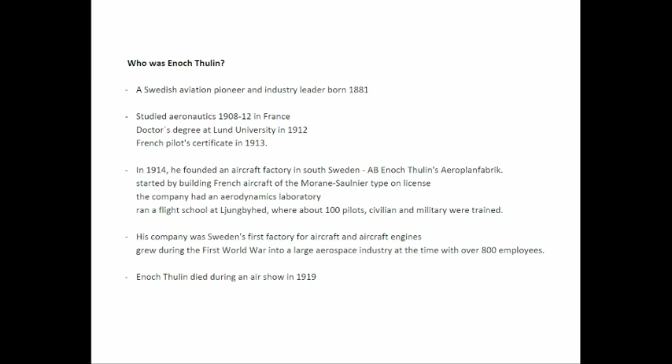But then he died during an air show in 1919, and the war was over, and there was no demand for his aircraft, so his company went bankrupt very soon.

But to his memory, we have the Thulin Medal by the Swedish Society of Aeronautics and Astronautics, and this memorial medal was instituted in 1944, and it's the most prestigious award for aviation and space in Sweden. It's available in 3 denominations: gold, silver, and bronze. So then you have the background about Enoch Thulin and why this lecture was named after him.

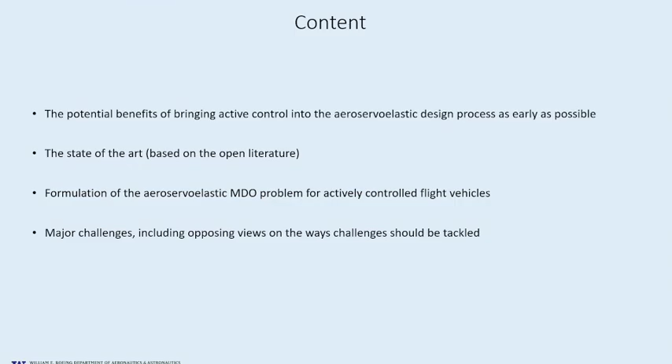I want to try to convince you that it is important to bring active control to the early stages of airplane design, that while it is difficult, it is feasible, it is doable. I want to briefly talk about the state of the art, since this can be viewed as a bit of an esoteric area. I'm going to insert 1 or 2 short tutorials into the presentation to make sure that we're all on the same page. And I want to formulate the multidisciplinary design optimization problem with aeroelastic control in a general way that hopefully will serve other people who develop this technology. And then I'm not going to hide from you that there are some debates and some disagreements about the way we should proceed.

So a very short tutorial about engineering optimization. We think about any system as a set of systems that can be parameterized and can be described by mathematical models. These mathematical models have parameters which determine what these systems are about. And as designers, we play with these parameters in order to get the systems that we want.

So in the case of a structure, for instance, even if the material is already selected and the shape is given, we can still ask ourselves what is going to be the best structure, maybe the minimum weight structure or the minimum cost structure that will meet all design requirements with the safety that we need. That's really the essence of the problem.

Following Lucien Schmit's terminology, I have a little picture here of one of his papers about the development of the history of structural optimization.

Those parameters that define these systems that we are designing can be split into two: the pre-assigned parameters, these variables that we are not going to touch during the optimization, and those design variables that we're going to play with during the optimization.

All of the constraints, all the requirements are described by mathematical functions of these parameters. The stresses in the elements, the buckling loads, the flutter parameters, the aerodynamic parameters, everything that the system does can be described as some function of these design variables, and we're going to put them in a list of what we call constraint functions that will limit us, will tell us what we can and what we cannot do in order to get feasible designs.

And then there is the objective function. What are we trying to minimize or maximize? Is it the cost? Is it the performance? And so on the right is the mathematical formulation of the problem: minimize some objective function of the design variables and the pre-assigned parameters over the set of possible feasible design variables, meeting all these constraint functions that I mentioned.

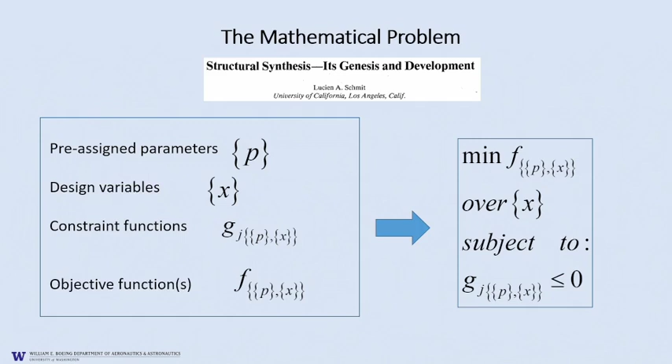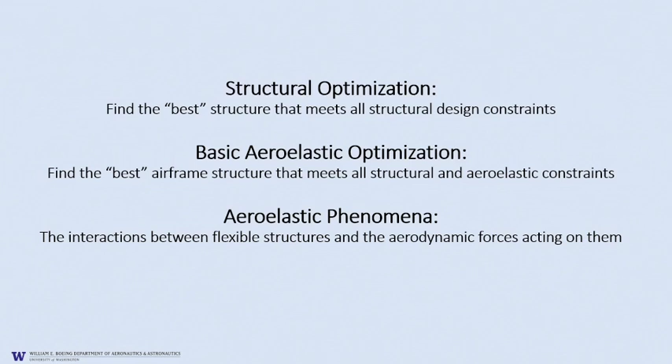Structural optimization is about optimizing structures. So you ask yourself, what is the best structure that I can build that will minimize the weight, minimize the cost, maybe maximize reliability, subject to all the stress constraints, maybe natural frequency constraints, maybe fatigue constraints, all those limits that will ensure that the structure is safe.

Extending it to aeroelasticity, the field where structures and aerodynamic forces interact when the structures are flexible and determine the forces acting on them. We have a problem where if we focus on the structure, we want to design a structure of minimum weight or minimum cost that will meet constraints on all the stresses and buckling loads, but also on some aeroelastic measures, such as flutter behavior, efficiency of ailerons, and things like that.

How would the pilots feel about them? How would the control system manage to work with them? So this is all the field of handling qualities. All this can be described mathematically.

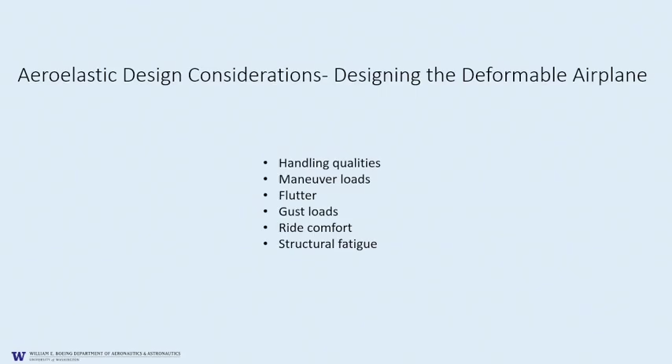Maneuver loads: these airplanes maneuver, and so you want to make sure that in all possible maneuvers, nothing fails. All the parts are within the stress limits, within the buckling limits, within the frequency limits.

Flutter is an aeroelastic instability, where as the speed or dynamic pressure go up, a kind of a feedback loop can lead to an unstable behavior. I'll show you an example of this in a few minutes, so I don't want to talk too much about it now. And then the issues that you all know.

You fly on passenger airplanes, you know the important issue of ride comfort. The airplane begins to hit turbulence, shakes a lot. So how do you design airplanes where that level of shaking will be tolerable? Passengers will tolerate it, and flight crews will tolerate it, and structural fatigue.

So these are typical constraints, typical design requirements in the aeroelasticity field that add to the structural requirements. So how do you deal with it? How do you design airplanes that would meet these constraints?

The traditional way was what we call the passive way: you just basically design the structures that would do it. If the structure is too flexible, you beef it up. You make it stronger, you make it more stiff, you add weight. If you can use composites, then maybe you don't add weight, but you can play with the fiber direction, so you can tailor the stiffness and control the stiffness distribution.

You can decide to move masses, place the engines here, place the engines there. If you have no choice, you will add ballast masses. And so in order to solve dynamic problems, all this has been used for years. The problem with this is that in almost all cases, this will add significant weight to the airplane.

Not to mention cases where you think you've done everything right, and now you have the prototype, and you already invested $7 billion in developing it, and something was missed, and you have an aeroelastic problem, and what are you going to do? Redesign the wings, redesign the structure. So usually the penalties here will be very, very heavy when you use the passive approach.

So I would say in the 70s, definitely the early 80s, it was clear that structural optimization should be expanded to cover aeroelastic optimization. Some great airplanes of the past were designed using structural optimization with aeroelastic constraints: the X-29 forward swept wing with composites, the F-16, the Rockwell X-31. It was clear that this was the way to go.

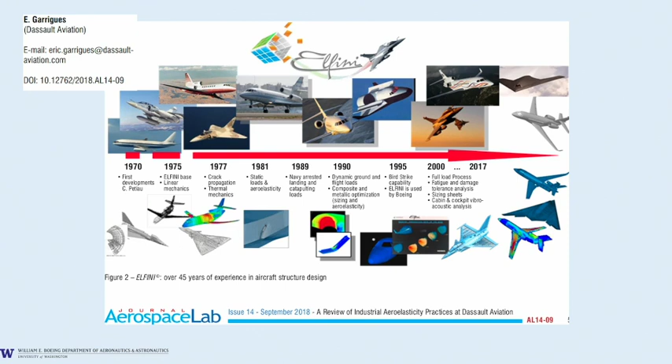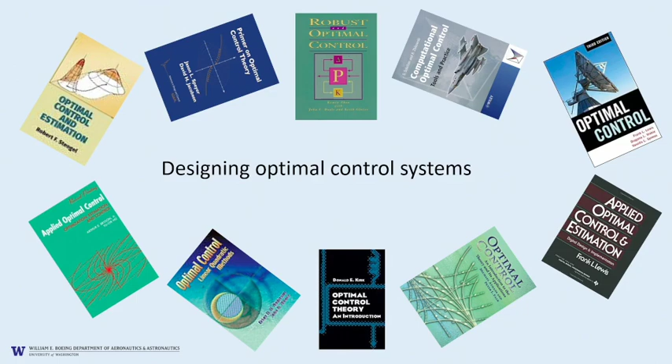So these capabilities are existent. Now, optimization has not been only attractive for structural and aeroelastic designers. Control system theorists and control system practitioners knew that it was important for them to design best control systems. So you just go to Amazon and search for books on optimal control, and here you are. The fact that you can design a control system not just to do the job, but to do it in some best way, covering constraints and other design requirements, was very well known, and the technology is quite mature.

So it was natural to ask if we could add active control to aeroelastic systems in order to improve them. In this figure, on the bottom two blocks in blue, you can see how the flexible structure interacts with the aerodynamics in a kind of feedback loop. You apply forces, the structure deforms, the deformation changes the aerodynamic loads, this feeds back, and that can lead to all these aeroelastic problems.

And on top in red, the structure is moving in space, it's deforming, so let's place some sensors, accelerometers, strain gauges, and use the signals from these sensors that tell us what they are doing in order to feed a controls computer that then would set commands to the actuators that would move control surfaces, and this way affect the total behavior.

So in the area of active control of aeroelastic systems, first you think of maneuver load control. Here the idea is that you will design your airplane structurally for, let's say, cruise conditions. You can see here in the broken line the perfect distribution of loads on the wing. You worry about the bending moments along the wing because that will determine the weight of the structure you'll need. But if the airplane maneuvers, pulls some G's, turns...

...these bending moments will go up unless you use the control surfaces to redistribute the load. You can see here in the solid line how, as the airplane maneuvers, the control surfaces go up or down, and the whole distribution will change in order to keep the loads within limits so that you don't have to add weight.

As I said, we all flew through gusts. This is a daily experience for anybody who flies flexible airplanes: you hit bumpy air, and they jump, and if you look out the windows, you see the engines moving and the wings flexing, and everybody gets very scared, except that when you know how safe they are, you shouldn't be scared. I get scared, even though I know it's safe. It helps my kids when I tell them, even knowing how to design them, I still get scared sometimes when the airplane shakes too much in flight.

And so here again, if you have an active control system, as the airplane begins to shake, the control surfaces can move dynamically based on some control law in order to reduce this level of shaking and control the dynamic stresses and the levels of vibration. And here is ride comfort. Well, we think about passengers in airplanes, but this is also a military problem.

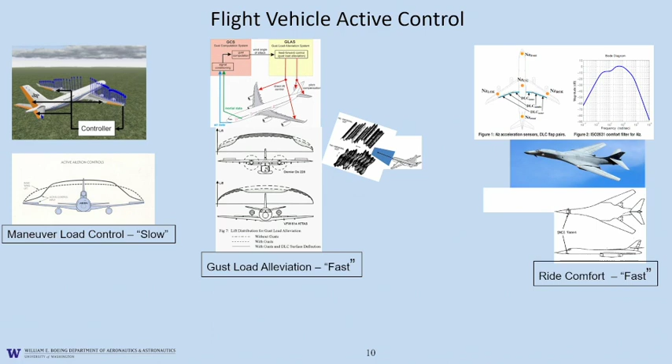This is the famous story of the B-1 bomber. It was designed as a supersonic bomber for a typical mission of going very high into enemy territory and delivering its ordnance. But with the development of advanced radar systems, the mission changed, and the airplane now was required to fly at treetops, basically using terrain following. Imagine a heavy bomber like this, very flexible, very slender, flying in canyons and over hilltops, really shaken by very turbulent air. The crews couldn't sustain it, couldn't stand the levels of vibration. So North American Rockwell at the time, now all Boeing, installed these two little control surfaces in the front, little vanes, and with the active control system suppressed the vibrations.

I talked about the flutter problem. As I said, this is an instability. The airplane begins to fly faster and faster. That feedback you saw, as the airplane deforms dynamically, it would change the aerodynamic forces, and those forces would then feed back and change the load on the airplane. If you're not careful, if it's not designed properly, you will get unstable oscillations that can destroy an airplane in a fraction of a second.

This is a famous story from the 80s. NASA developed a special drone for aeroelastic research, called DAST, for drones for aerodynamic and structural testing. They had an active control system, and all the great people of the time designed control laws. And lo and behold, in one of the tests, there was a miscommunication between people, and they programmed the wrong control law to this drone.

They realized that this was the case, and they started to slow it down, but it was too late. On inertia, the airplane was accelerating. If you look at the figure in the center, and I apologize, I imagined a screen where I'd be able to use a laser pointer to point.

I did not imagine such a huge screen, so I will direct you just by telling you what to focus on the slide. So when you look at the center, look at the bottom, you will see the Mach number going up with time. As the Mach number goes up, the airplane becomes unstable. The control system tries to do something, but it's too late, and the airplane breaks into pieces in a fraction of a second.

So it is a very dangerous phenomenon, and you cannot allow any airplane to ever encounter this kind of phenomenon. The passive solution here will be stiffness and the correct mass distribution, but maybe we can use active control instead, and program the control surfaces to respond to motions in a stabilizing way so that we don't have to add all the weight to the system.

So here is the story. First, you can see the flexible airplane, the deformable airplane in flight. It is driven by inputs. These inputs come from pilot commands to the actuators and from gusts in the atmosphere. It responds by moving, and it's moving around as what we call a rigid body, and it's also flexing in flight. You have a set of sensors that measure this deformation.

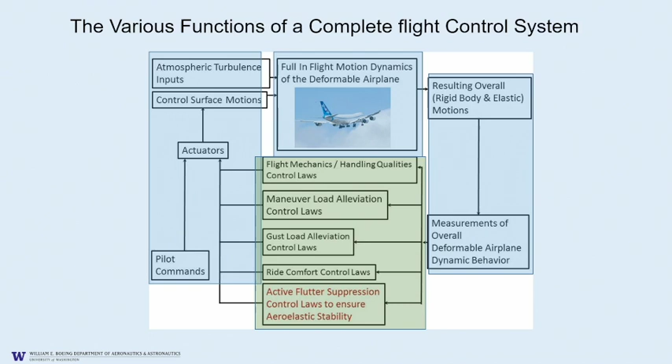They feed this information to a bunch of control laws that are on a controls computer, and these control computers send inputs to the actuators to close the loop and to create a system that, using active control, will meet all these requirements on flutter stability, dynamic loads, ride comfort, fatigue, and so on, without having to add substantial weight to the structure.

This was already envisioned in the early 50s, but the technology was not there in order to do it. Late in the 60s, the US Air Force gave Boeing Wichita, when Boeing was still in Wichita, a contract to test it on a B-52 bomber.

So Boeing took a B-52 and modified it by adding control surfaces. I'm not going to go into the detail, but just looking at the figure, you can get some sense of the heavy instrumentation of these airplanes. It was equipped with more control surfaces, more sensors, controls computers.

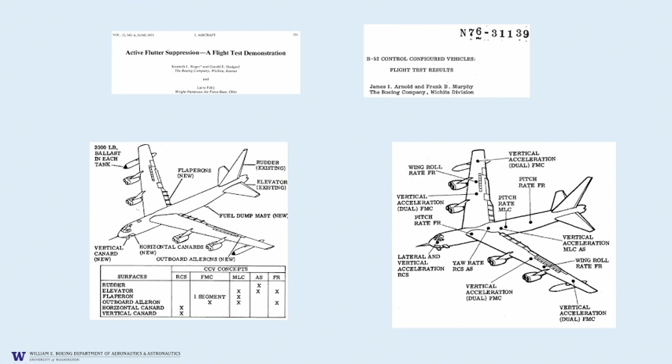And what they also did, they deliberately lowered the flutter speed of the airplane. These fuel tanks that you see near the tip of the wings, they installed heavy ballast masses at the nose and deliberately made the airplane flutter at very low speeds. And the goal was then to fly it beyond the flutter speed on active control and see how everything worked.

This is, I don't know if you want to call it the beauty of the beast, a phenomenal machine, very complicated, done in the early 70s. You can see in the nose area some of the added control surfaces. And Boeing demonstrated that indeed the airplane could fly on active control beyond the flutter speed, meeting design requirements, all using active control.

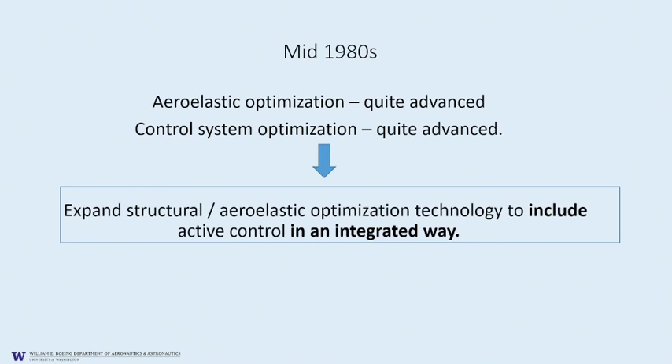So by the mid-1980s, aeroelastic optimization was quite advanced, not where it is today, but it was quite advanced. Of course, control system optimization was quite advanced too. So it was natural to ask, when we design an airplane, what if we integrated everything? What if instead of doing the structure separately and the control system separately, we would integrate everything into one optimization problem where everything will play together?

Before we go and talk about what was done in the 80s, I want to add a few notes. So far, I talked about the problem in a very analytical way. The control laws were some block diagrams, some mathematical expressions, and we talked about computers and structures. But it's not so simple. When you add a control system to an airplane, you add substantial complexity to the system. There's no free lunch in the world. There's no free lunch in aeronautics.

So we can control the airplane using a control system, but what is the price of the control system? These actuators, these computers, these data buses, all these hydraulic lines and the reservoirs, all this means weight and cost.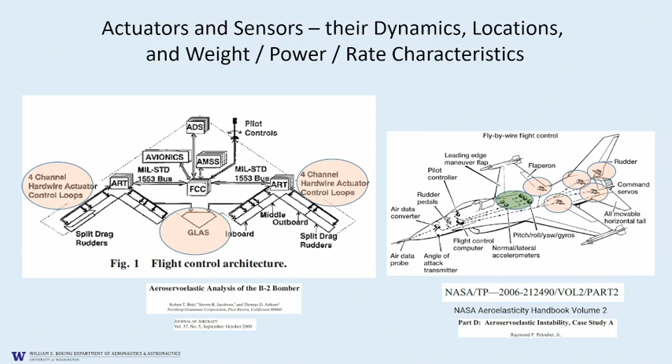Without going into much detail, just to give you an impression, what you can see on the left is the architecture of the control system of the B-2 bomber. This is a quad system. Basically, there are four systems designed so that when one or two of them fail, the other ones will take over. So you'll have quadruple capability in terms of actuators, computers, and things like that.

That's heavy. That's complicated. That needs maintenance. So just talking about how you add controls and solve all the problems in the world is not going to lead you anywhere if you ignore this. On the right, you can see a typical F-16, and you can see, again, its actuators and its computers.

The other very important question is the question of mathematical accuracy. The optimization process is a mathematical process. So every time we change the design, we have mathematical models that will tell us what happens. How do the stresses change? What is the flutter speed going to be? We have to have accurate mathematical models for the optimization process to make sense. Otherwise, we'll get nonsense. And we are talking about very complex systems.

You have to capture by analysis the structural behavior, the structural dynamic behavior, the steady and unsteady aerodynamic behavior, and of course the behavior of the actuation system, the sensing system. This is not an easy job, even today.

And so here is an example from the B-2. It's true this was done some years ago, but if you look at these diagrams on the left, you can see a frequency response. This is what happens when you use the elevons to affect the bending moment of the B-2, and you change the frequency. And you can see in the low range of the frequency, the broken line is the original analytical prediction, which was completely off.

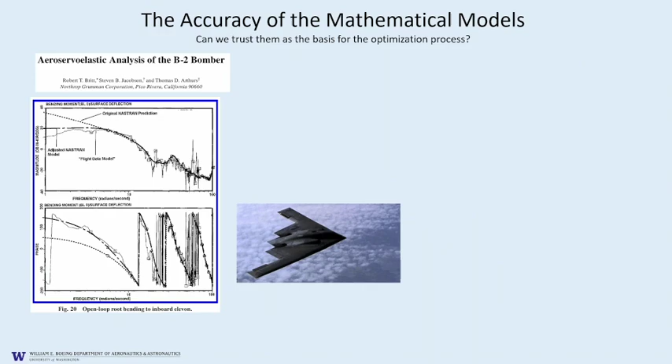Flight tests showed that they had a big error there, and they had to go back and fine-tune their mathematical models. If this were to be used for optimization, the optimization process would not lead you to the correct result.

More recent results are from Dassault, from the same paper on the Falcon business jet. And again, just to get an impression, the analysis captures the behavior quite well. This is again some frequency response, some input, some output. But you can see that as you go higher in frequencies, there is a mismatch.

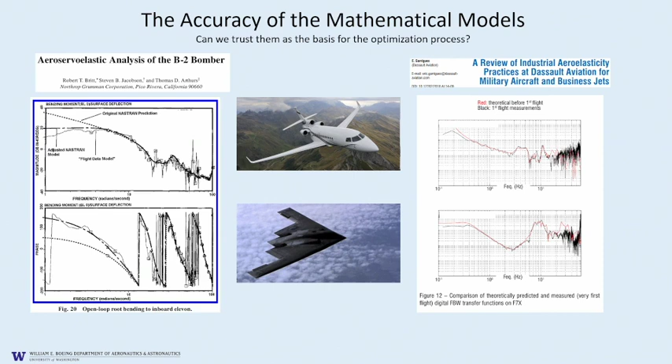What does it mean when you design a control system for something like this? So the accuracy of a mathematical model for real airplanes, and I'm talking real airplanes, not academic cases, simple cases, which are all nice and lead to many papers in the journals. I'm talking about what it would take to really affect the design process in industry. You must have accurate modeling in order to do meaningful optimization.

So as it happens, things kind of congealed and popped up almost simultaneously in three places. One was Terry Weisshaar at Purdue with a student, Tom Zeiler, in collaboration with NASA Langley Aeroelasticity branch, Jerry Newsom there. And they wrote a very nice paper on the idea that it was time to integrate control and aeroelastic design. But their paper was really a concept paper, and they demonstrated it using a very, very basic, simple example.

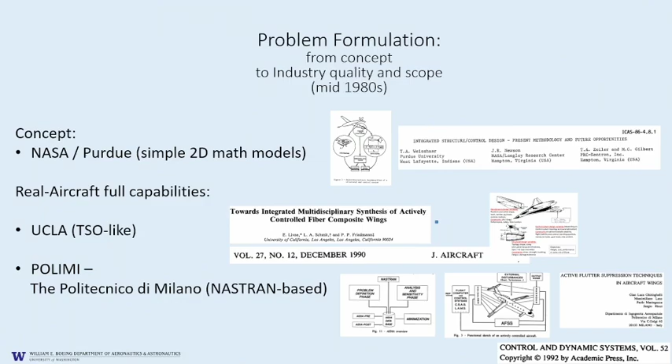But when you talk about doing it with mathematical capabilities that would allow you to design real airplanes, it happens in two places almost simultaneously: at UCLA in the mid-1980s, and at the Polytechnic of Milan at about the same time. We didn't know about each other's work.

I was working at UCLA with Lucien Schmit and Peretz Friedmann. I came from the Israeli Air Force. I had a lot of experience. I worked with the most advanced airplanes of the time, the F-16s and the relaxed static stability systems, the F-15s, the advanced F-4s. So I saw a lot of these aeroservoelastic problems in practice, and I had some ideas on what should be done.

And in Milano, the great Paolo Mantegazza, with a phenomenal team of students, developed a similar capability, with some differences. What we did at UCLA in the structures area used some approximate models for wing structures that were good for fighter jets or supersonic jets, but not so good for high aspect ratio, subsonic passenger airplanes. Paolo Mantegazza and his team did it right.

They used Nastran, they used finite elements.

Great students, one of them, Sergio Ricci, who's here, talking about people that I'm indebted to. It's so nice to have known him from his PhD days, where we found ourselves working on the same thing, and now collaborating on other projects of active flutter suppression.

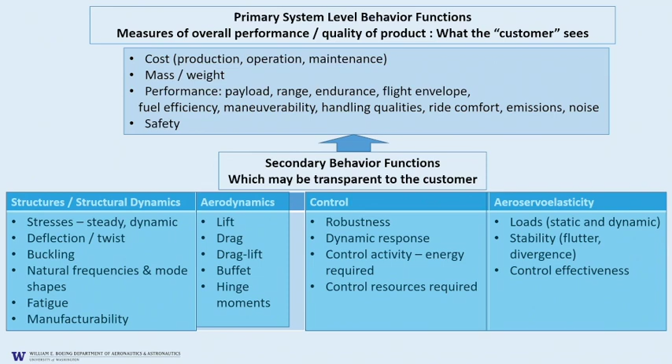In controls, similar story - we care about the robustness of the system, how it deals with uncertain situations, and the dynamic response it gives. In aero-servo-elasticity - servo mechanisms for controls - we care about dynamic loads, flutter, and control effectiveness of the structure. So these are the behaviors that determine the constraints and objective of the design.

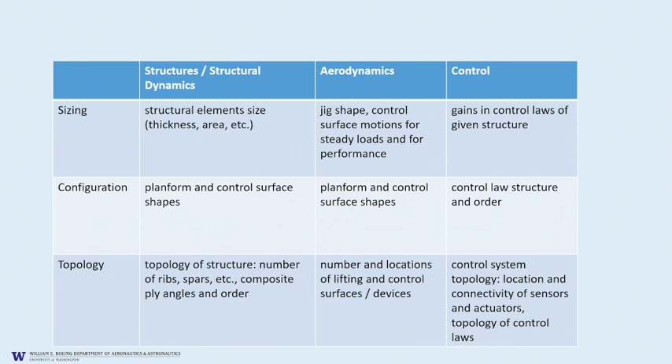On the design variable side, we have variables coming from structures, aerodynamics, and controls, with 3 levels according to their complexity. At the lowest level are sizing type design variables. So if we talk about structures... yes, it works, great - I'm very happy this PowerPoint presentation does work.

At the lowest level, you have a structure with a shape, everything connected in a particular way - you want all elements to have correct thicknesses and areas so stresses stay within limit. Going up in hierarchy, you allow the shape to change - here are the loads, but maybe the structure would be a different shape than I started with. At an even higher level of complexity, you have topology, where you play not only with shape and sizing but with how elements connect points in the structure.

Much, much more difficult. Same in aerodynamics - you can start with a given aerodynamic shape, but change the jig shape, how you'd build it so it deforms in flight to the correct configuration, and you can go higher in hierarchy to play with the full shape of the airplane, and similarly for controls.

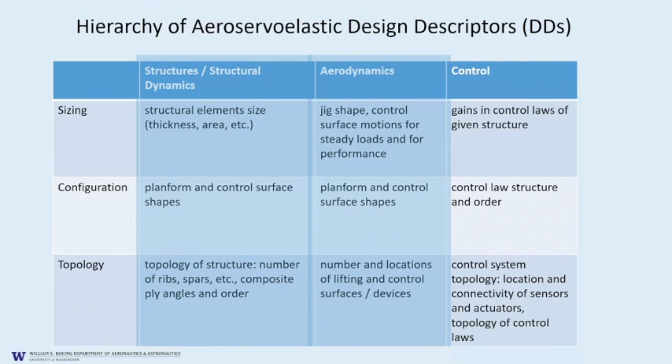At UCLA, we created a code that could handle all this for design variables of the sizing type. It could play with composite layers of the wing and tailor them. It could play with control laws by adjusting the coefficients of transfer functions of the control laws. And it could play with the aerodynamics by designing the jig shape of the airplane.

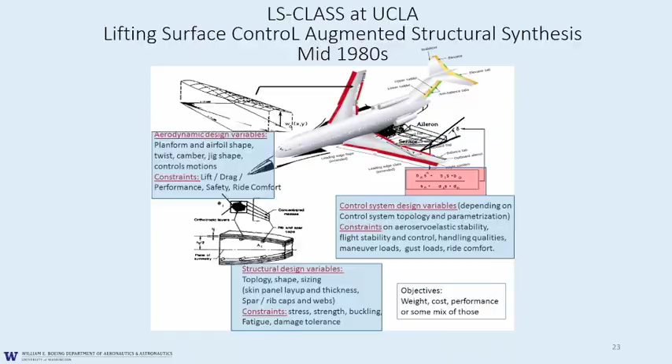An example is a drone similar to the ones I showed you, where in blue is the structure of the wings we want to design. The skins of the wings are made of composites. There are two control loops. One is below, controlling the elevator to make sure the airplane maneuvers correctly. At the tip of the wing you can see a sensor, a control surface, and a control law that will take care of flutter.

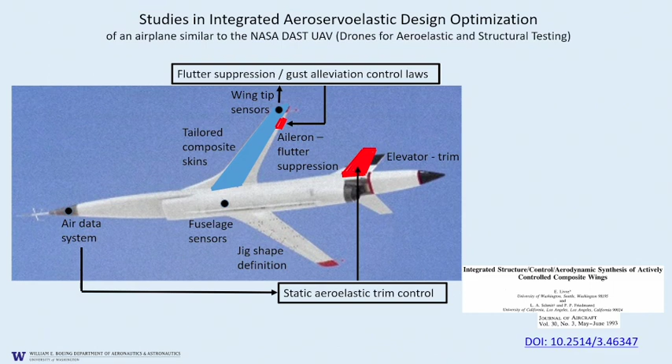Now, if we still play only with structural design variables and add some drag constraints, we say that design we got, we don't like the drag, we want to reduce it by 20%. Now we don't play with the jig shape. So we find a mass of the structure that's a bit higher, maybe 10% higher.

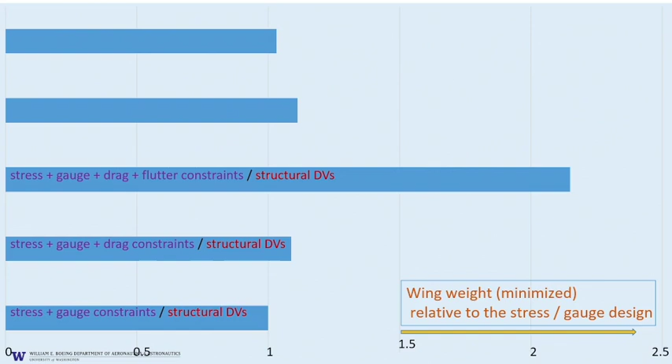Again, this is highly simplified. To be honest, I did not include the effect of the weight of the actuators here. I should have, but I didn't.

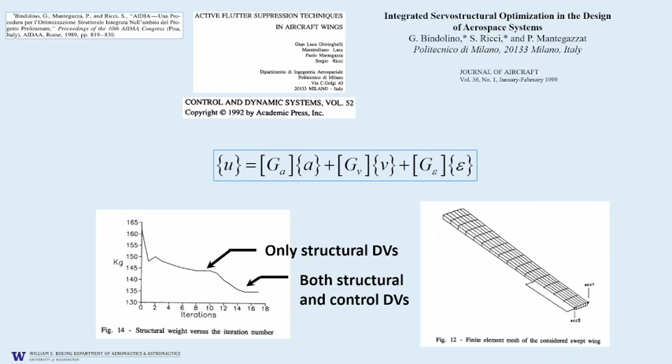This is the work from Milano. At about the same time, they created a code named AIDIA. Here is an example—the controller is very simple, though they played later with more sophisticated controllers. You can see the iteration on a wing design where they use only structural design variables: the weight goes down to something like 145 kilograms, and with the controls in the loop, down to 135.

This is from Moti Karpel and Moshe Idan at the Technion—a very interesting parameterization of the control law, a kind of mix of junctions where control signals meet and separate, simple gains where you just take a signal and multiply it, and also single-input single-output and multi-input multi-output blocks, that's the SISO and MIMO blocks. Everything can then be plugged into an optimization process where you optimize the structure and the control systems.

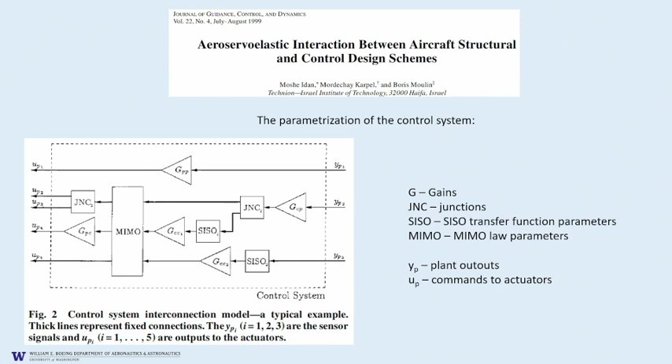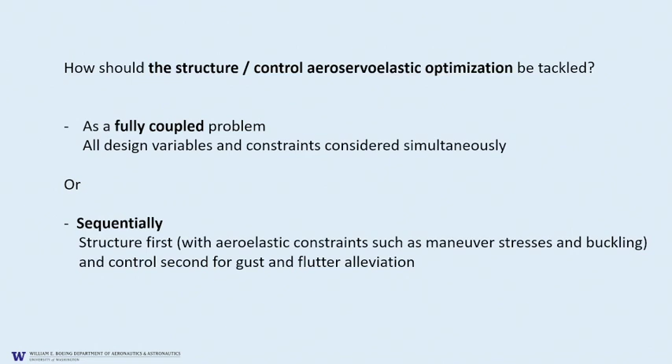They worked on a fighter jet where they first optimized the structure, then activated and optimized the control system, then went back and fine-tuned the whole thing. So the question arose: should we design the structure, freeze it, design the control system, then go back to the structure, then back to the control system—where we know how to design control systems for certain structures and structures for certain control laws—instead of doing it in one shot? I was always a believer in the one-shot approach where you do everything at the same time, but I'm not sure I'm right. I'm not sure the other way isn't just as good.

Here is some work we did at the University of Washington with my student Tim Jackson. We created a multidisciplinary aeroelastic, aeroservoelastic finite element code. What's special about this was that we used shape memory alloys—so we used strain actuation and articulated actuation.

And we asked ourselves whether there was a best way, an optimal way, to use both control surfaces that move part of the way in an articulated manner, and then fine-tune and create more complicated shapes using strain actuation, like piezoelectric or shape memory alloys.

My great pleasure, I sometimes get emotional about it, is that Tim Jackson is now the head of dynamics and loads for Boeing St. Louis, in charge of all military programs at Boeing St. Louis, and soon I think at Boeing in general.

Here's the control law in Tim Jackson's work. It's based, if you look at the equation at the top, on the states in the dynamic model of the system. They describe aeroelastic states, actuation states, sensor states, gust load states, the traditional equations in state space of a dynamic system, and the control law tries to minimize this integral at the bottom, which, intuitively, is a kind of superposition of two effects.

On the left is some quadratic form of the displacements and the velocities, a kind of mix of strain energy and kinetic energy. And on the right is a quadratic form in the control effort, which tells you something about the control energy or the control power that you need.

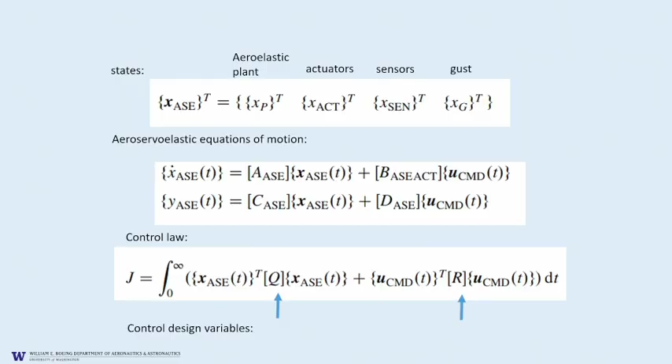And you play with these matrices, the Q and the R, in order to give certain weights to what you need. Do you want to focus on minimizing the control effort, or do you want to focus on getting the response to decay as quickly as possible? We use those as design variables in this integrated design.

Phenomenal work from Brett Stanford at NASA Langley. I'm showing the results of only one paper of his, but really talking about capabilities that he developed that are industry level, that can handle real airplanes. Finite elements, unsteady aerodynamics as used today in aeroelasticity, realistic models of actuators, accounting for the weight of the actuators.

So he published a number of papers. We don't have enough time to look at all of them. This is just one selection. This is a passenger airplane with a CRM wing.

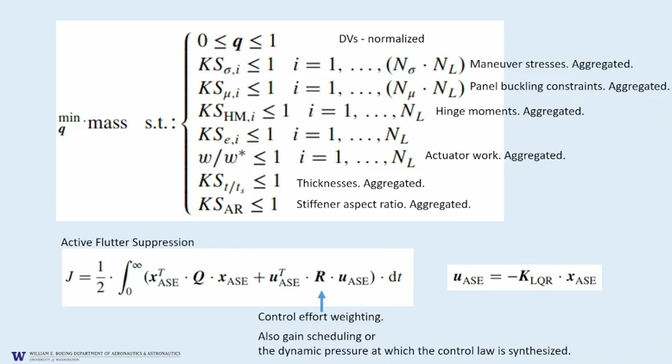So you see, if you do not place a limit on the control system, that is, if you allow the control system to do as much work as it wants, you can bring the weight of the wing down significantly. But the moment you begin to limit the work of the control surface, as you move left, the resulting weight of the wing goes higher and higher, because now the control system is not allowed to help you as much as it would like.

And similar results from the work at UCLA. So when you look at the figure on the right, these are three histories of an optimization, and what we're interested in is just the end results.

These circles that appear show you the end result. This one shows the result of optimizing a wing with an active control system, with flutter constraints, stress constraints, and the whole host of constraints I mentioned, but with no limit placed on the effort of the control system. If you begin to limit the control system, the system will still meet the requirements, but the weight will be higher because the control system isn't allowed to do whatever it wants. Limit it even more, and the weight goes up further.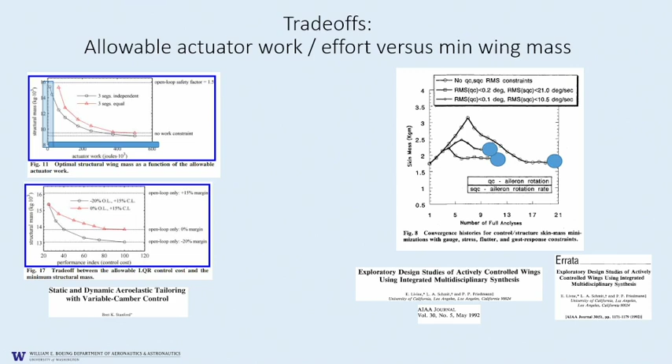So there's consistency between the results that Bret got with these very sophisticated models and the results I had, God knows how many years ago. Very interesting work from Stanford, from Ilan's crew.

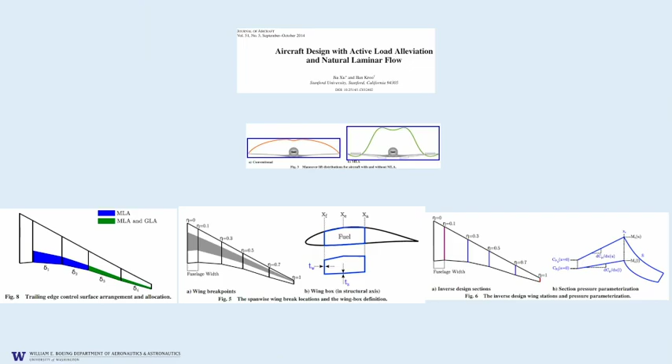Very briefly, here they are designing a natural laminar flow wing. The idea is to get as much laminar flow over the wing as possible in order to reduce drag by using optimization. They use maneuver load alleviation and gust load alleviation to control the stresses in the structure. Their design variables, in addition to structural design variables that decide how the wing will be built, also include shape design variables that determine the wing's planform, how swept and how slender it is, as well as the airfoil shape, plus constraints on the pressure distributions to achieve the laminar flow they want.

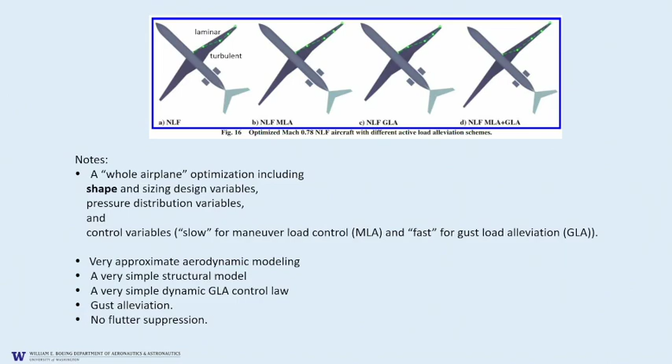On the right is a design that also focuses on natural laminar flow, but now with maneuver load alleviation and gust load alleviation. Look what happens to the wing: much more of it is now covered by laminar flow. What makes this possible is that the aspect ratio of the wing becomes higher, the wing becomes narrower, and the chords become smaller. A wing like this, without maneuver load alleviation and gust load alleviation, wouldn't work—you'd have to build a lot of extra weight into it structurally. But with active control, you can achieve this integrated multidisciplinary optimization and get an effective airplane.

I've just sampled a few works in this area. Unfortunately, not much has been published—I was a bit surprised when I looked at the literature. I was hoping I'd just missed things, but not much work of this scope has been published; I may be missing some very recent developments. But I do want to mention quickly some nice work from Quim Martins and his group at the University of Michigan, where they used robust controls to optimize a UAV. Also some work from Rafa Palacios at Imperial College, on a basic level but really addressing mathematical issues of optimization and the kind of design space they had. And some recent, promising work from Airbus in France.

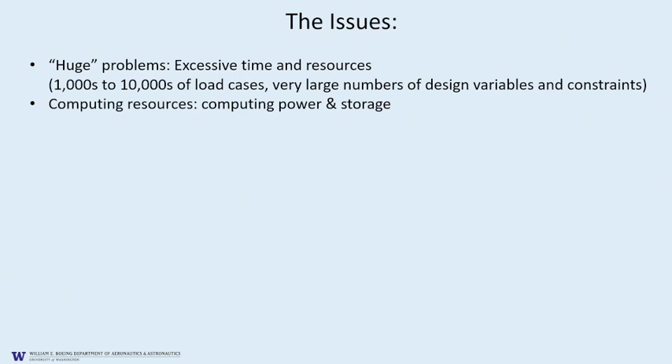So the issues: we're talking about huge problems, many design variables, many constraints, very demanding. This brings up the issue of computing power and computing memory. We need to model structures and aerodynamics accurately and smoothly for optimization. What controller strategy are we going to use? How do we parameterize control system designs that will work well in the integrated process? How do we design control systems that simultaneously handle flutter, ride comfort, and all these other things?

Manufacturing has to be reasonably possible. What about going up in the hierarchy of design variables, from sizing type to shape type to topology? What about the math models of actuators? What about the locations of actuators on the structure? And then the predictive accuracy of the mathematical models, which are crucial if you want to do optimization.

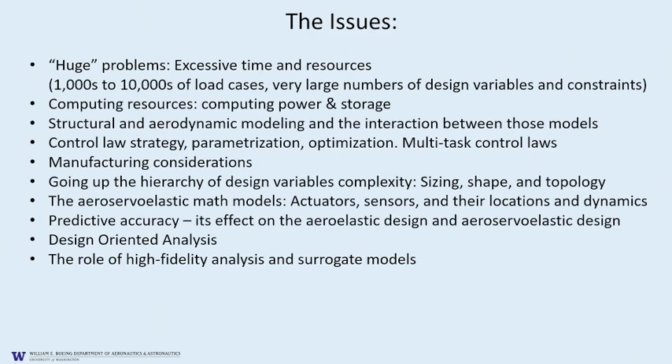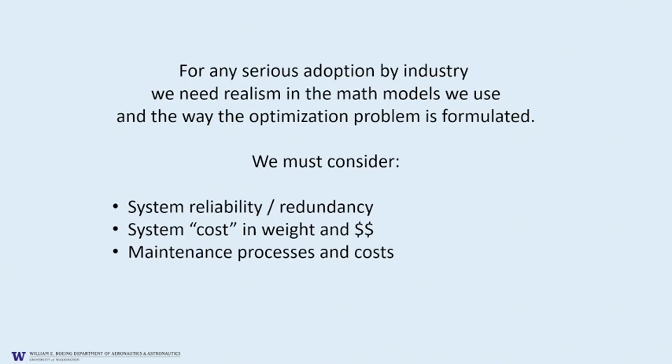And then the design-oriented analysis that would work with the optimizer, the role of high-fidelity models and their surrogate approximations that we use for optimization, so that optimization is possible, and the big problem of uncertainty. So all this has to be done. If you want to make an impact on industry and how things are done, we must account for system reliability and redundancy. We must account for the actual cost of what we do in terms of weight and dollars, and process time, in terms of how long it takes for industry to complete a design, and we have to remember maintenance costs.

And so where are we? In terms of aeroelastic optimization, we are quite advanced. This is something, again, I stole from a paper from Quim Martins' group. So we know how to optimize structures and aerodynamics together with great fidelity. We know how to model actuators quite well, and if we don't, we can always test them on the bench.

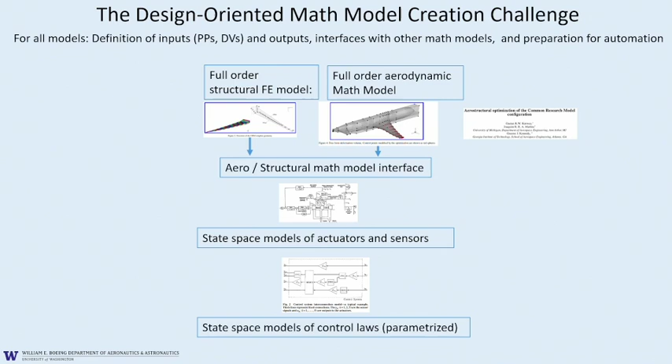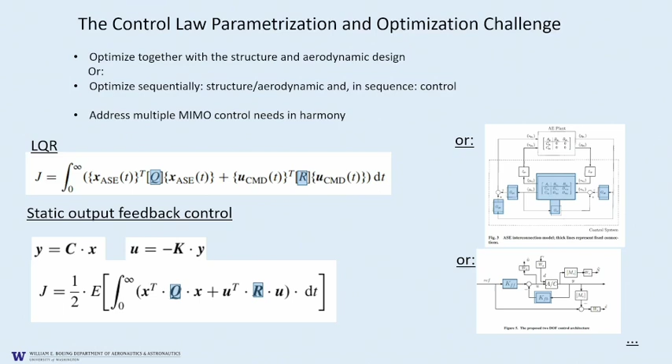At the bottom, where it's not clear yet what to do, is how do you parameterize control systems and what kind of control strategy you would use. And this is just an example of different controllers. I'm not going to talk about it in great detail. It's enough for you to look at the picture and to see the blue squares showing you parameters in the control laws that the optimization process would work with. The jury is still out. It's not clear what is the best way of doing it.

Here we are. So this is the problems we are facing. The design variables at their very different levels, the behavior functions, which represent the constraints and the objectives, and the mathematical model, which covers the airplane, all its systems, which have to meet all the constraints.

So in this integrated aero-servo-elastic optimization, if we compare it to just aeroelastic optimization, and this is back to the Dassault figure, where are we? This is the Dassault figure. It shows you the development of aeroelastic optimization from the 70s until now. So in our area, where are we about here? Are we about here? I don't know.

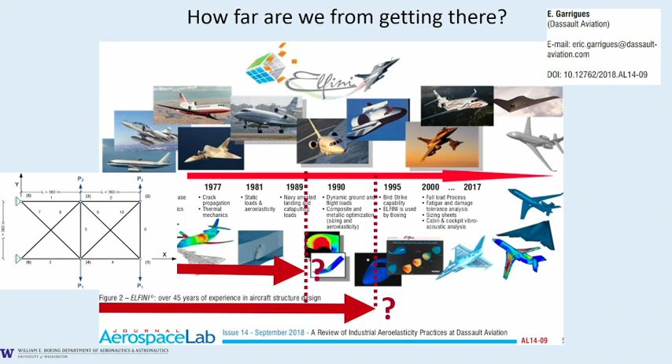We are definitely not there. We are definitely not where we should be. Just at the same time, no need for despair. I truly believe that what I have outlined is possible and achievable, and it's just a matter of time. Remember, the structural optimization started with a truss structure, the 10-bar truss on the left, and ended with a high-speed civil transport configuration some years later. So I'm confident that what I'm outlining here is doable.

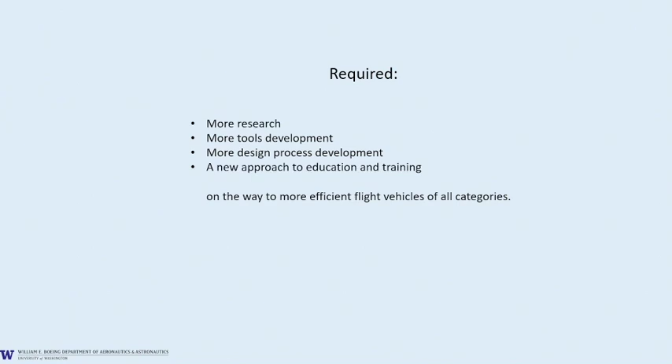What needs to be done is just more research, more tools development, more design process development because of the integrated nature of the problem, and very important—actually I had slides about it, except that the time limit here prevents me from using them, and I know you're happy. We're going to finish it on time.

Education. Multidisciplinary education in aeronautics is more and more important. The systems get complicated. It's really important that we educate students who are at home with structures, aerodynamics, controls, airplane design, and aeroelasticity. At the University of Washington, we have a special master's track. This was actually developed because of a request by Boeing. Our first graduate was my master's student, Allison, who is now working for Boeing Dynamics and Loads. And I think that every university should consider something like this to make sure that we send students into the world who are at home with the complexity of the systems that we are designing.